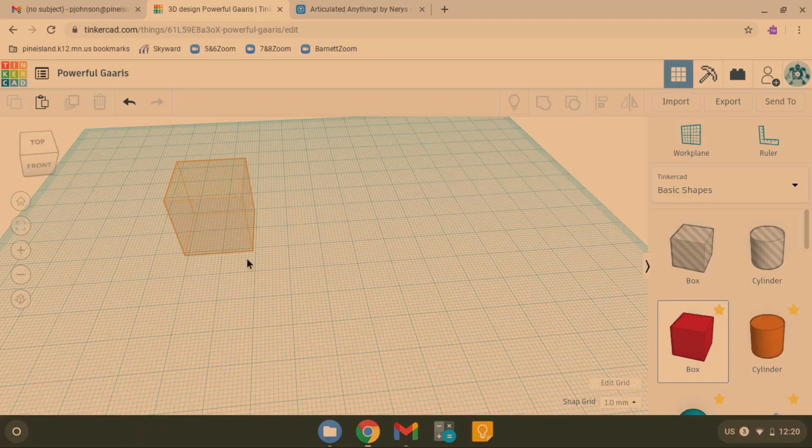Alright, what we're going to do is make something articulate, and it can be a Batman symbol, it can be something that has to be relatively flat. So just to show you the process, I want to put a hinge in this thing. So I'm going to make it a kind of a low box.

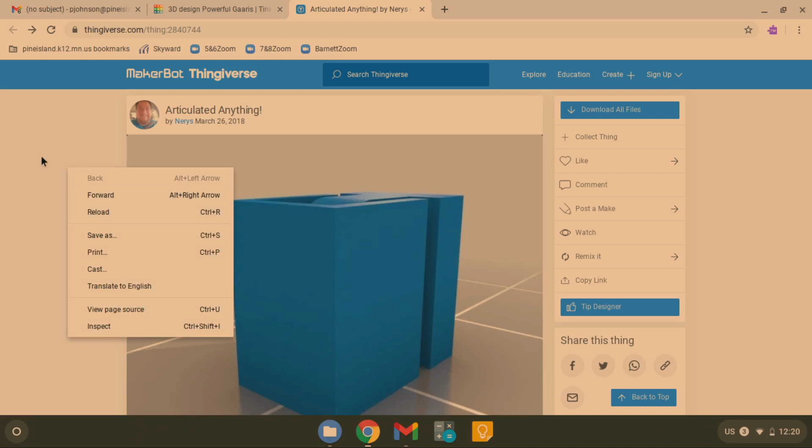What you need to do before you even get started is find some parts online. Here's the site you can get to, I'll have the link beneath this video. It's called Articulated Anything. What you can see here is a hinge.

What you need to do is download all files. So we're going to download these files. They'll show up over here as Articulated Anything. In a Chromebook, what you need to do is drag them over to the side, or try to open them, and what happens is that they mount down here. This is a zip file.

So what I downloaded was one thing, but it had multiple things inside. When you open it in a Chromebook, it takes you here, where you can read all of the different files inside. We have images we can take a look at, but we don't want those, we want the files. So let's get out of here, and in Tinkercad, import these files.

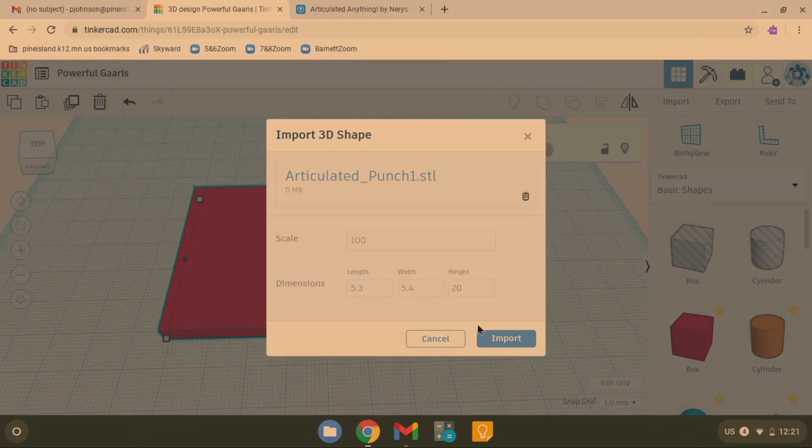So now that they're open down here, there's the punch. We're going to import the second one, the hinge, and we are going to import the last one, which is the slicer.

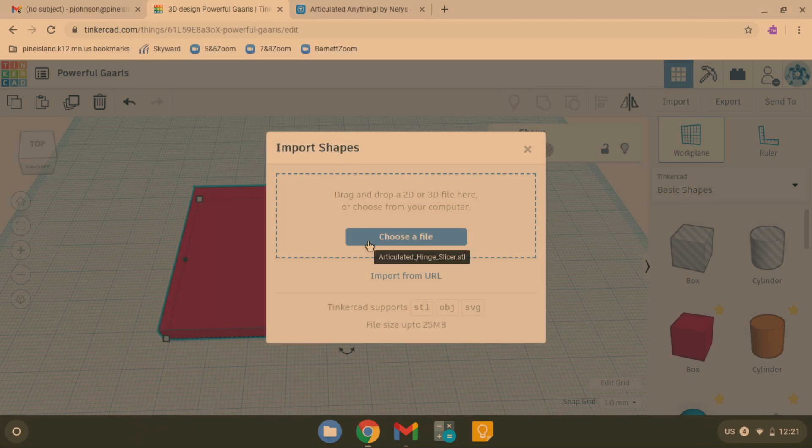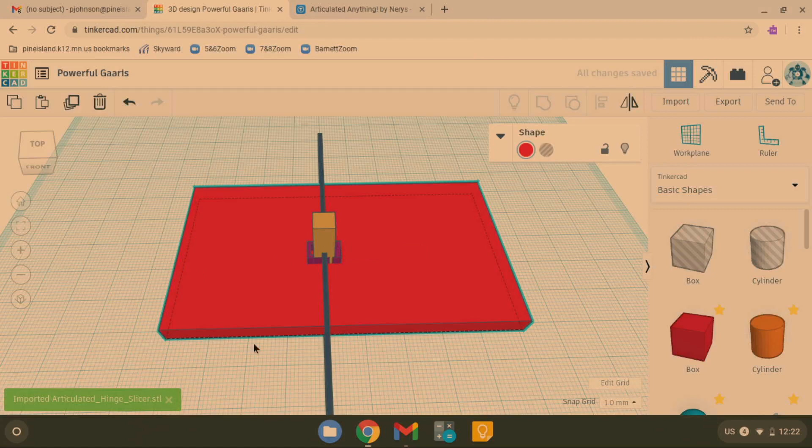I had clicked on the work plane, so it wasn't working. So now that I have all three of these, two of these are going to turn into holes, and you can tell which one is the hinge pretty easily.

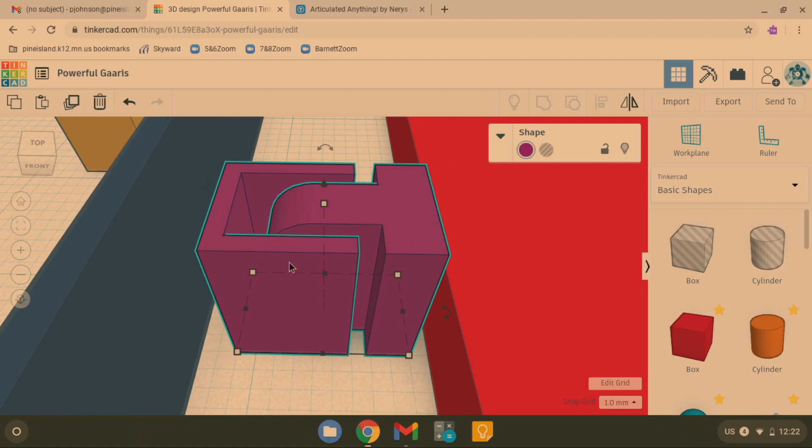So here's the hinge. If I take a look at it, you'll see that there is a long slot, but between these two pieces is a pin holding them together. So this circle right here surrounds the pin that is between them. That's how the hinge works.

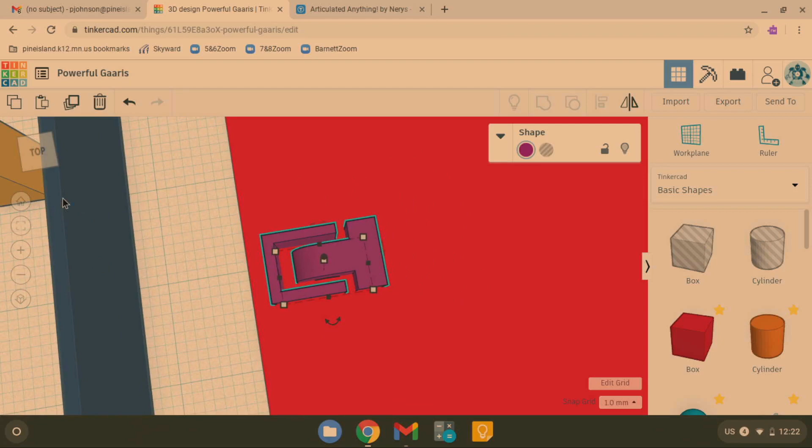But if we just throw the hinge inside of your material, the red material is going to gum it up, and it will not work because that red stuff will get 3D printed and fill everything in. So we need to get rid of that using a punch. The punch that we downloaded, once we turn it into a hole, is what is going to take care of that for us.

So once the punch makes a hole, then this hinge will work perfectly. This slicer is what will slice the piece into multiple chunks that will turn.

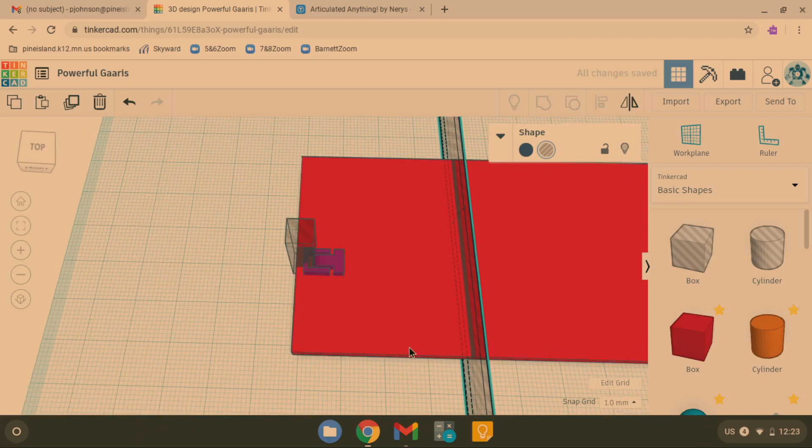So let me really quickly add these. And before I assemble them in the next video, what I want to do is add them to my shapes collection.

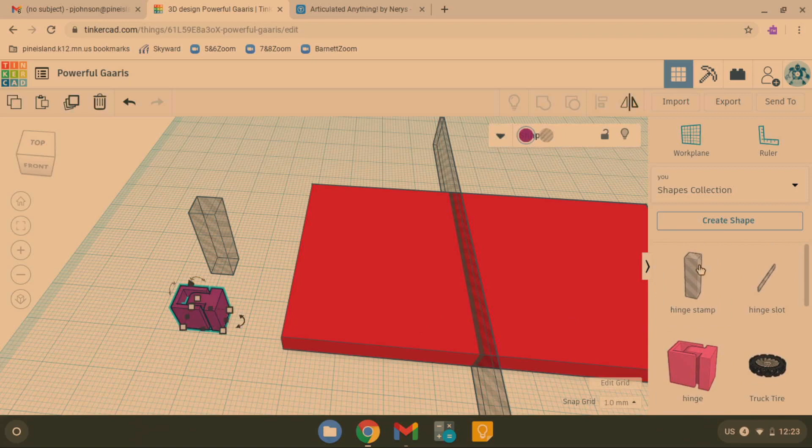So I've already got them here, but if you click on the hinge and you click create shape, what you can do is save this shape forever and you'll never lose it. So hinge, okay, click save shape.

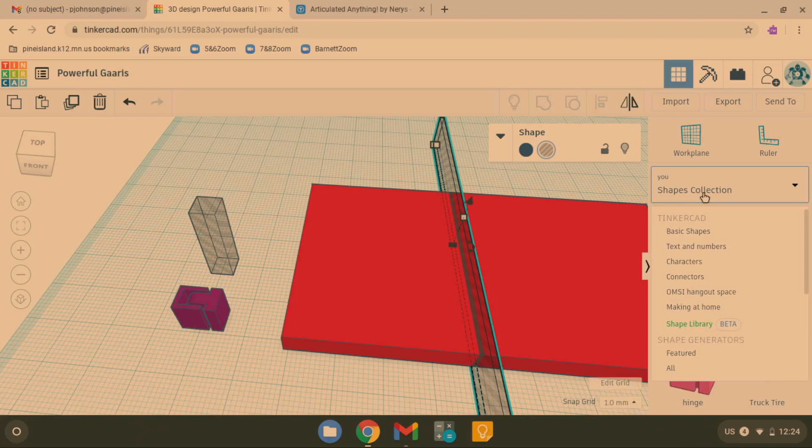Then here is the stamp. So I already inputted it as hinge stamp. And here's the hinge slot or slicer. I made those by creating a shape here in the shapes collection. So go ahead and try to get these pieces.

Meet me in the next video where we will put them together.